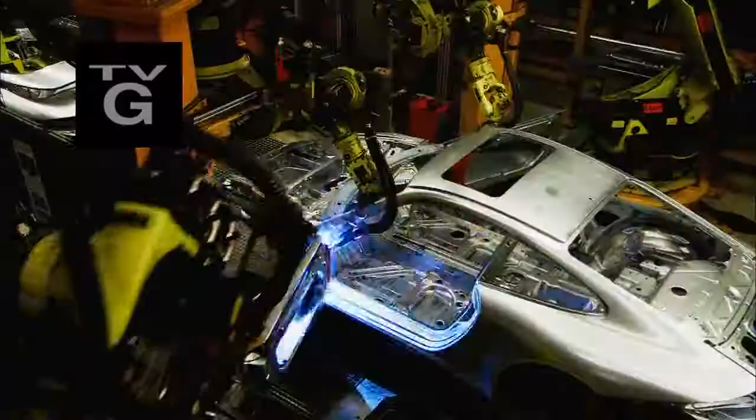German factory builds one of the world's most famous cars. The 911 is the icon of the sports car industry. It's the shape, it's the engine in the back, it's the feel it gives you, it's the emotion. The factory runs like a precision machine, building hundreds of engines a day. The product and our manufacturing process are one unit, and that's our secret of success.

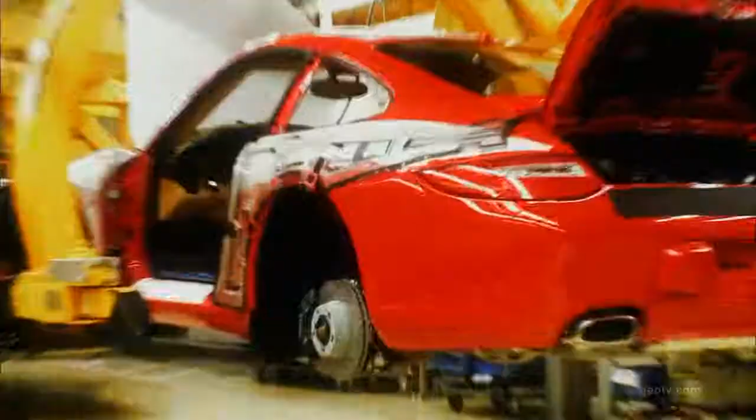Automation, technology, and skilled human labor combined to build 16 versions of the Porsche 911, including the 911 GT3. Lots of our customers, they want a race car, and they want a race car that they can use on the normal street as well. The Porsche 911 has been made for more than 4 decades on the same grounds in Stuttgart, Germany, at Porsche's ultimate factory.

The Porsche 911, small, light, nimble, and always powered by a flat 6-cylinder engine in the back of the car. Automotive journalists say the 911 may offer the ideal connection between car and driver. The 911 is like a glove that fits you perfectly. The car communicates very directly what it's doing, so it's a very emotional driving experience to have a 911 under you.

That emotional experience is tempered with practicality. You can go to your groceries with the car, you can go shopping. You can use it during the week going to work. And if going to work involves commuting on parts of the Autobahn without a speed limit, all the better.

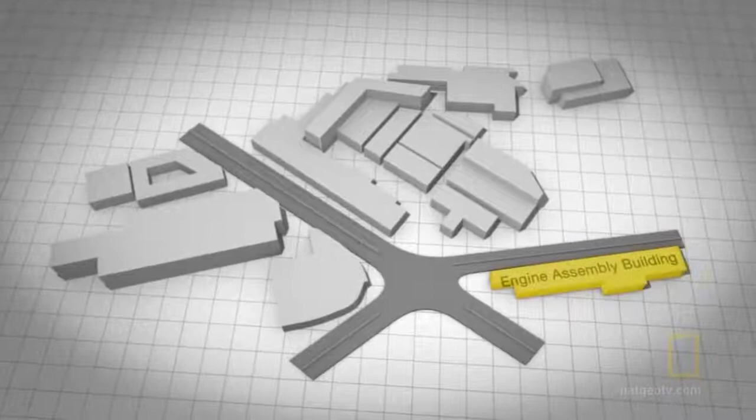Since 1964, every 911 ever built has been made in Porsche's ultimate factory in Stuttgart, Germany. The factory consists of several industrial buildings that are linked together. The car's body shell gets its color in the paint shop. The 911's famous flat 6-cylinder engine is built in the engine assembly building. Leatherwork for the car's interior is handcrafted in the upholstery shop. Finally, all the pieces come together in the vehicle assembly building, with its 117 assembly stations.

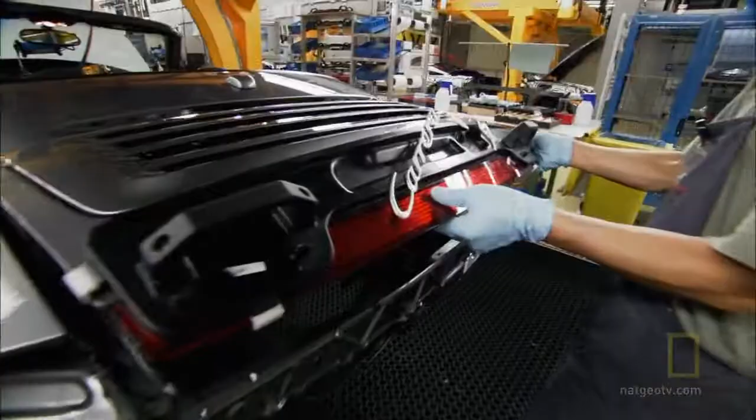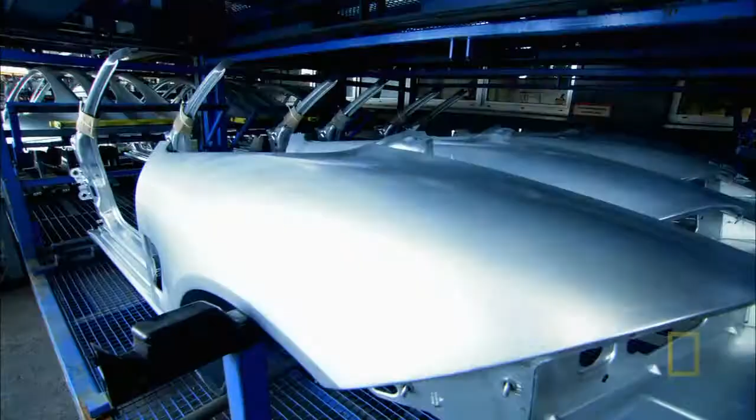The factory builds all 16 models of the 911, plus 2 Porsche Boxster models on the same assembly line. Every day we build approximately 40 Boxsters and about 110 Porsche 911s. The 911's body begins in the body shell assembly building. Outside the body shop, stamped steel body panels are standing by. Inside, 105 robots, along with teams of skilled welders, fuse the car's frame together.

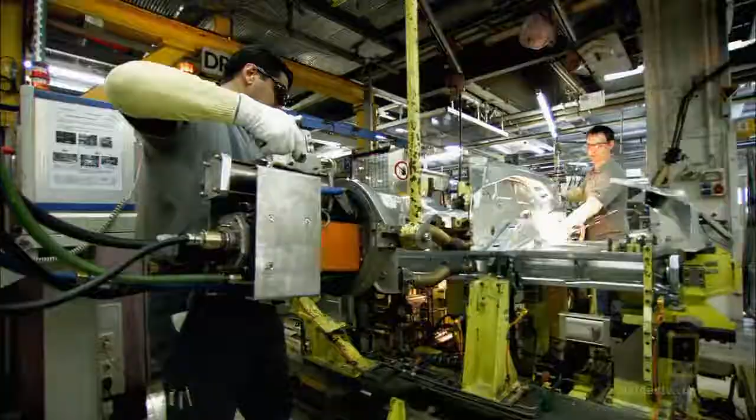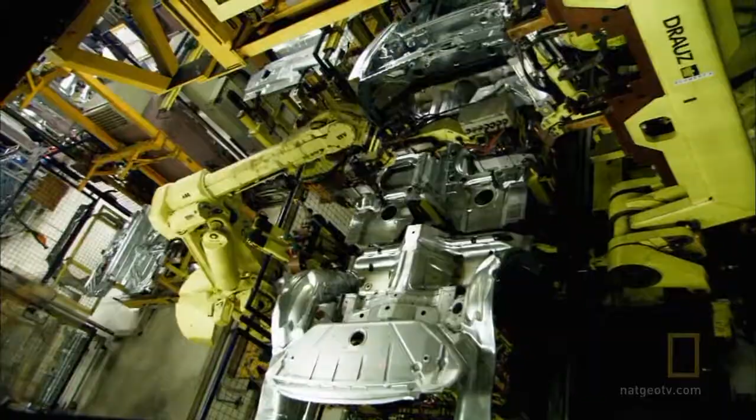The frame is made of 3 sub-assemblies: the front compartment, the mid-floor pan, and the rear compartment. Each sub-assembly is welded together from stamped steel parts. This welder spot welds the front compartment of the frame, while this welder works on the rear compartment. The front compartment is then sent off to be joined with the rear compartment. When the mid-floor pan is added, clamps hold the 3 pieces in place. Then the robot welds them together, making them one.

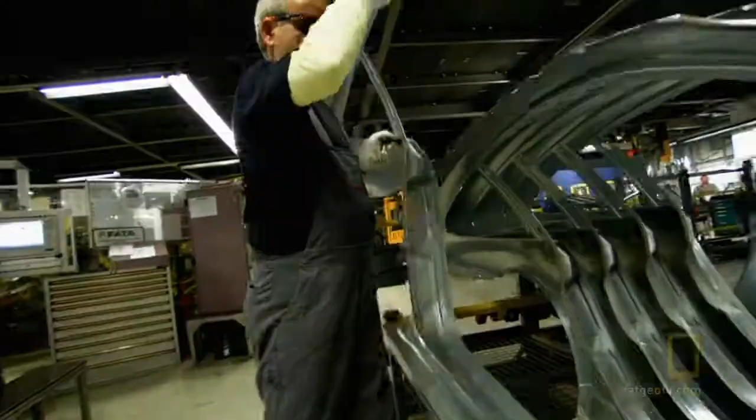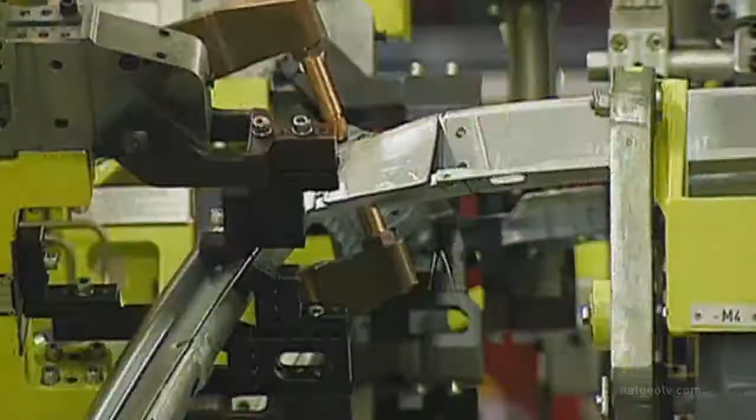A team of human welders places a shield between them to protect against sparks and glare. They reinforce the job, welding seams robots cannot reach. At this point, every 911 frame on the line is identical. But all that changes at the geometry station, where the various model rear side panels are welded onto the vehicle. Here, the car becomes a hardtop or a convertible cabriolet. Since this car is destined to be a hardtop, robots ensure it gets a roof.

When the welding is done, another group of robots attacks the frame. This time not to weld, but to pierce it. Hundreds of rivets and screw holes will allow technicians to attach components to the body later in the assembly process. Next, robots select doors and weld door hinges to the frame. Almost 5,000 welds later, the robotic work is done in the body shop.

Now, workers place the metal body panels that give the 911 its unmistakable front shape. It starts with the front quarter panels. And at the next station, the luggage compartment cover or hood. Now the body shell is complete. Even in this raw form, the body has the iconic shape of the classic Porsche 911. A shape that has been world famous for more than 40 years.

When the 911 was launched for the first time in 1964, the design was almost shocking, or you could say very much ahead of the time. In that time, the Porsche 911 has seen evolution in its design, but never revolution. There may be no other car that has changed so little in appearance during the course of several decades. It may surprise some to learn that this high-end sports car's beginnings can be traced to another famous, but much more humble car.

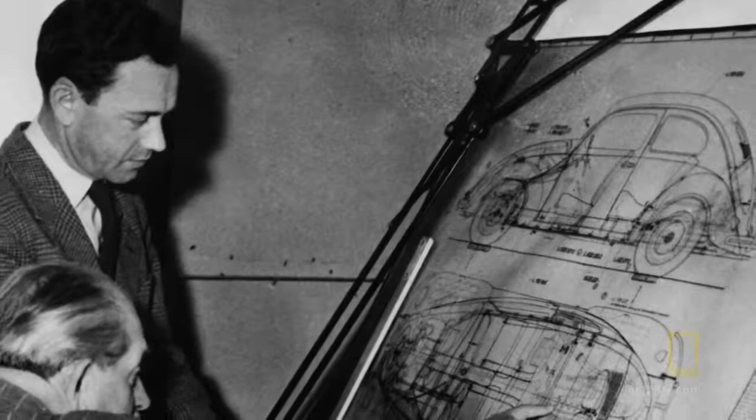After World War II, Ferdinand Porsche's son, Ferry Porsche, took control of the company. Ferry Porsche wanted a sports car, not for the general public, but for his own driving pleasure. A post-war shortage of parts forced Ferry Porsche to use components from the Volkswagen Beetle: the rear-mounted air-cooled four-cylinder engine, the gearbox, and the suspension. Ferry Porsche modified everything to make it more sporty.

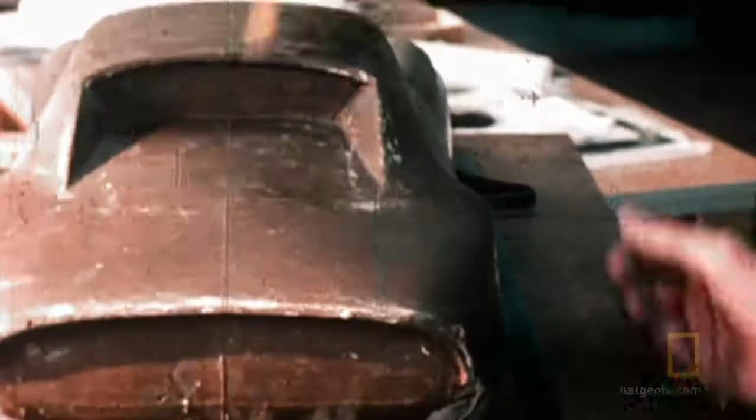The car that emerged in 1948 was the Porsche 356. More than 75,000 were made over the course of 15 years. It was the first sports car to bear the Porsche name. In the late 1950s, Ferry Porsche wanted a new sports car. This time, he insisted on a more powerful six-cylinder engine.

For the new car's physical design, Ferry Porsche turned to his oldest son, known as Butzi Porsche. He realized a perfect successor of the Porsche 356 because he used the classic design line of the car, but he moved it in a very forward way. The result was presented in 1963 and eventually was called the 911.

Over the course of 4 decades, the design was updated just 5 times, resulting in 6 generations of 911s. I think the design carries on because Porsche always understood very well what you have to do to bring the 911 design language into the future.

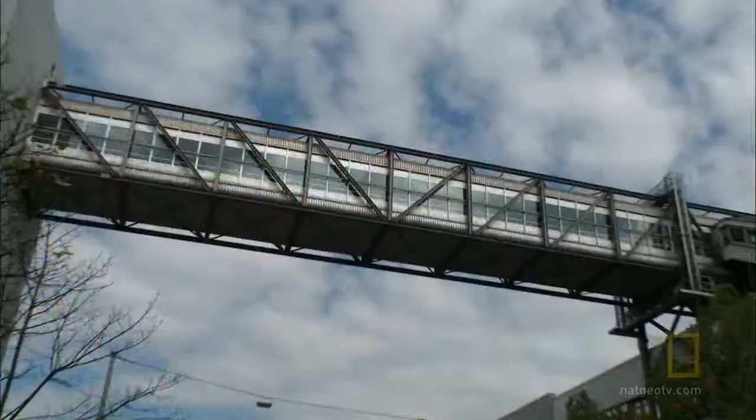Now, the unpainted body shells descended from the first 911s built in 1964 are ready to leave the body shop to be painted. The trouble is, the body shop and the paint shop have a 4-lane road separating them. So how does the body shell move from the body shop to the paint shop? A bridge. This bridge is going over one of the most used streets in Stuttgart. It takes about a half hour for a body shell to travel 94 yards over the bridge to the paint shop.

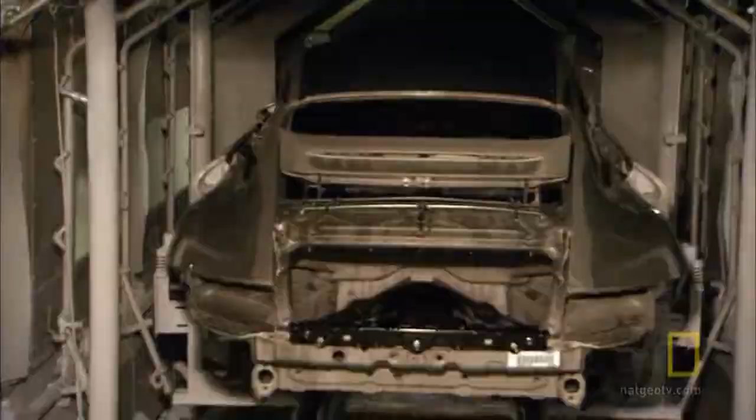The paint shop's first step is a car wash that removes dirt and grease. Bodies are then blow-dried to remove any lingering dust. Once the surface is clinically clean, it heads into a paint bath containing almost 16,000 gallons of paint. The bath holds an anti-corrosion paint called cathodic dip primer.

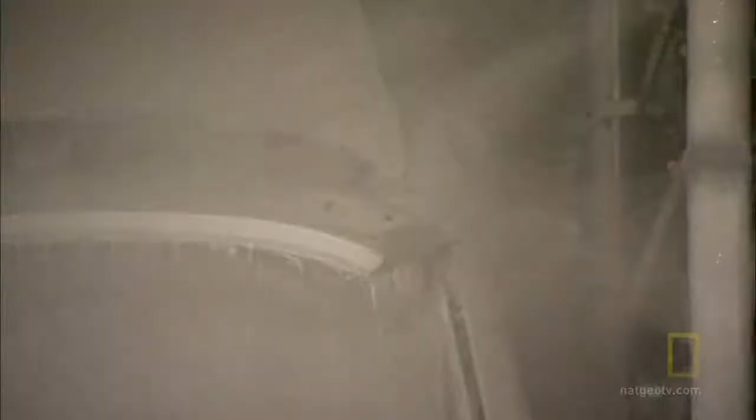The cathodic dip primer is electrically charged positive. The metal carrier that holds the car carries a negative charge. As the car is submerged, the carrier agitates the car, making sure the positively charged paint is drawn to every part of the negatively charged body. When the car emerges from the bath, the bond of the paint is so strong that excess paint can be washed off with water. Now the car heads into a dryer for 30 minutes to cure the cathodic dipped paint.

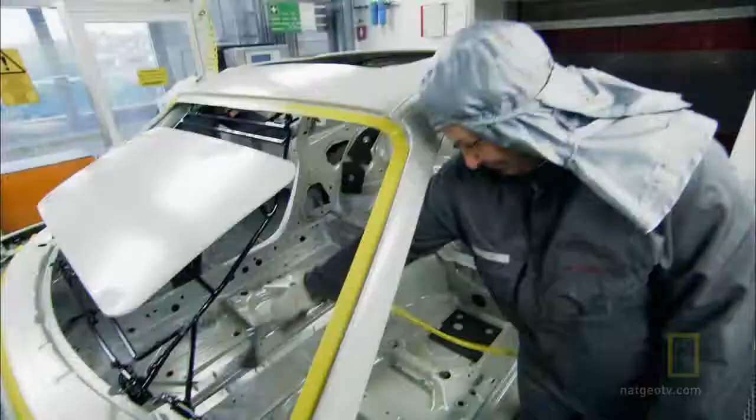A single speck of dust can ruin a paint job, which is why technicians dust the body before the primer coat. The interior of the car is primed by human painters. The exterior is where the robots take over. The primer is electrically charged positive. As the robots atomize the paint into the air, the paint is attracted to the car's negatively charged surface.

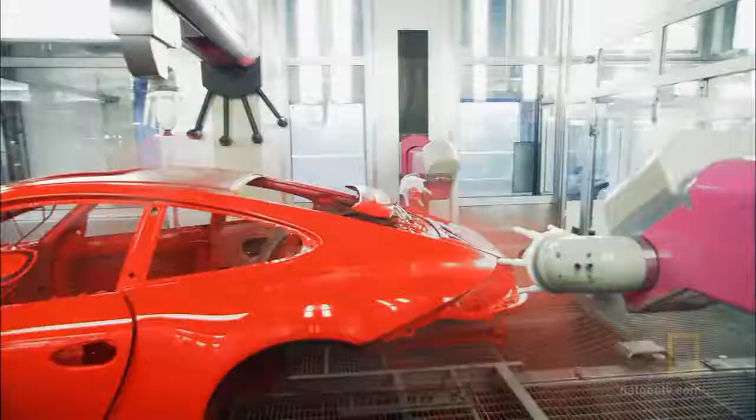It may look like the color coat, but it's not. The primer can be one of 5 colors: white, light gray, dark gray, yellow, or red. The selected primer color is the closest match to the color coat. With the primer complete, the car heads into a 338-degree Fahrenheit dryer for 30 minutes. Now, it's time for the car to get its color coat.

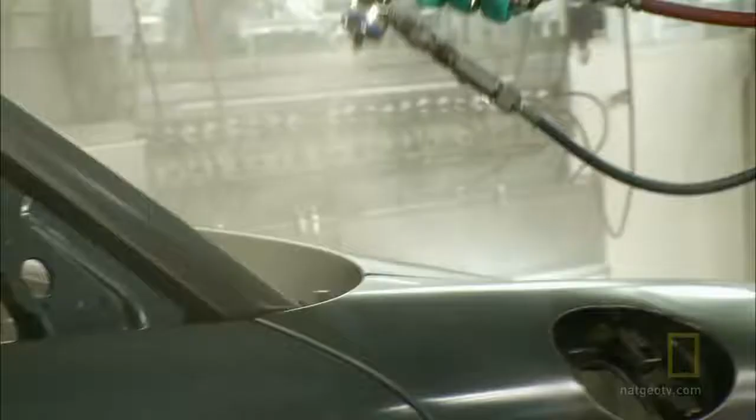The most popular colors for a Porsche are black, white, red. Porsche offers 12 standard colors, plus 9 premium colors. But for a fee, Porsche will custom paint your car any color you want. Because of the number of colors offered by the factory, the color coat is painted by hand.

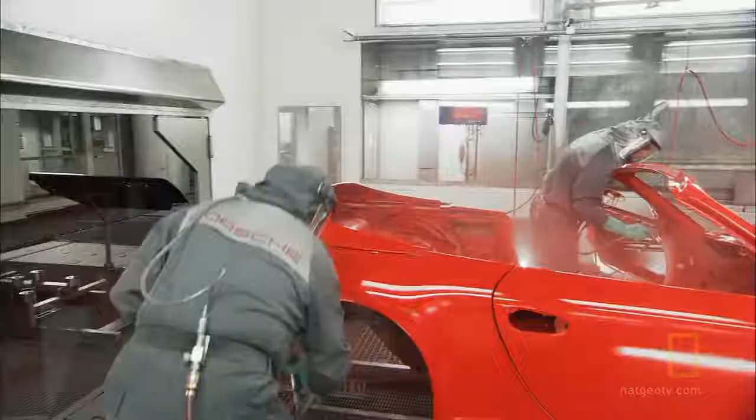Painters are trained to paint the body from front to back, beginning with the top before moving to the sides. It takes 3 years of training before a painter is allowed to spray the color coat onto the cars. Ventilation systems supply clean air through the painters' masks as they spray the water-based paint. In all, over a gallon of paint is applied depending on the color. With the color coat complete, the 911 heads into a 320-degree Fahrenheit dryer to cure the paint.

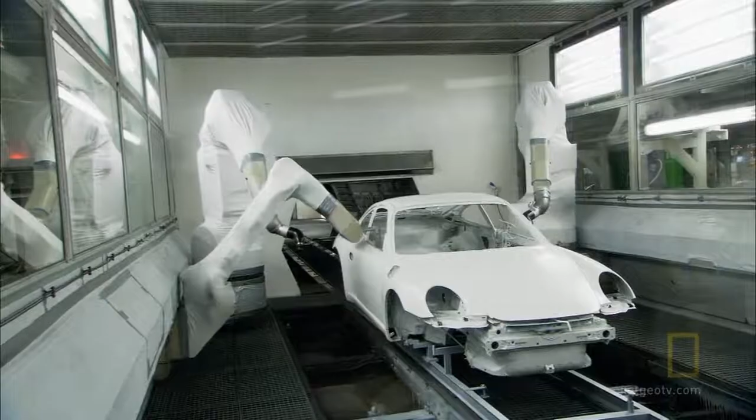The final layer is a solvent-based clear coat. The clear coat is painted by robots because the same clear coat is used for every car. The robot is also programmed to open the doors of the car and coat the interior surfaces. The paint shop's final job is putting the Porsche logo on the vehicle's hood. In all, it takes 8 hours for a 911 to enter the paint shop as a steel shell and exit a painted car.

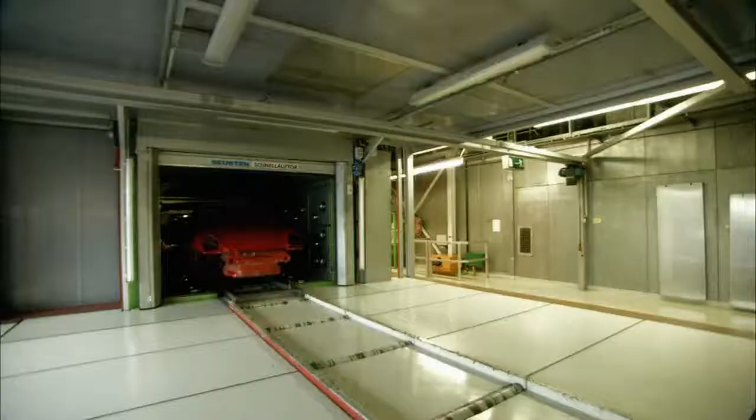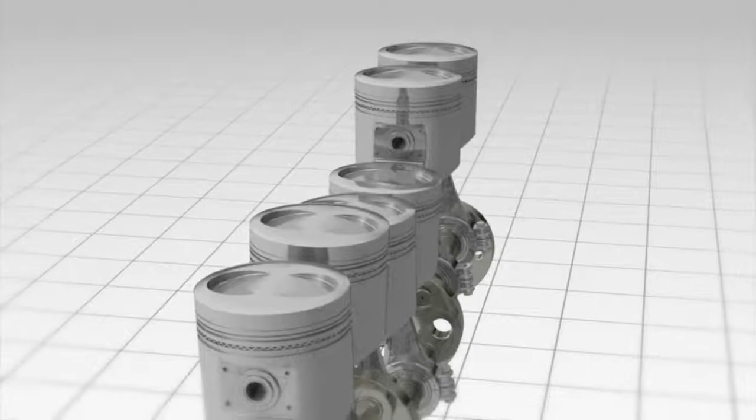Now, preparations are underway to build the vehicle's 6-cylinder heart. From the very beginning, since 1964, the heart of the Porsche 911 has always been a 6-cylinder engine. But not just any 6-cylinder engine. 6-cylinder engines come in 3 major types. Some are straight 6s. The most common 6-cylinder engines are V6s. The Porsche 911 has always used an engine known as a flat 6-cylinder, with 2 rows of 3 cylinders horizontally opposed to each other.

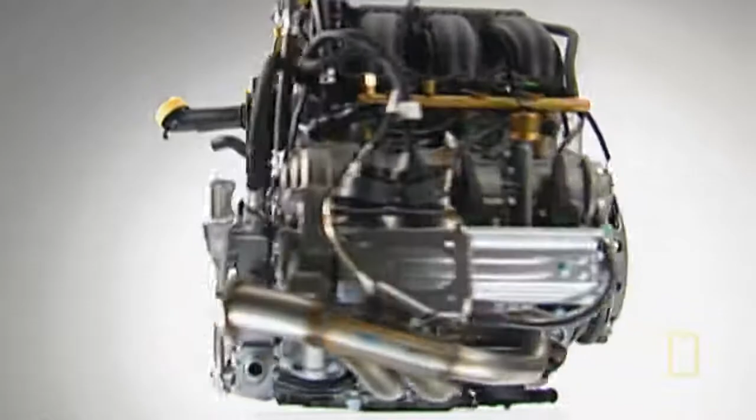Porsche believes there is a key advantage to the flat 6 design when used in its sports cars. The biggest advantage of using a flat 6 cylinder in the Porsche 911 is its low center of gravity, because it's very small. You can mount it down low in the body. The lower center of gravity contributes to improved handling. The lower the center of gravity is, the more stable the car is at high speeds and in cornering.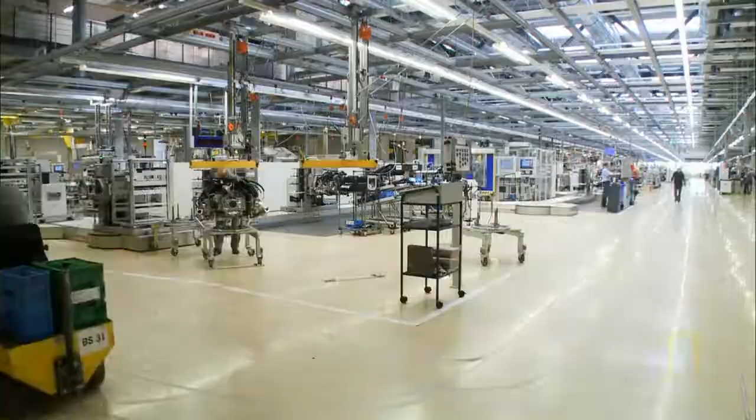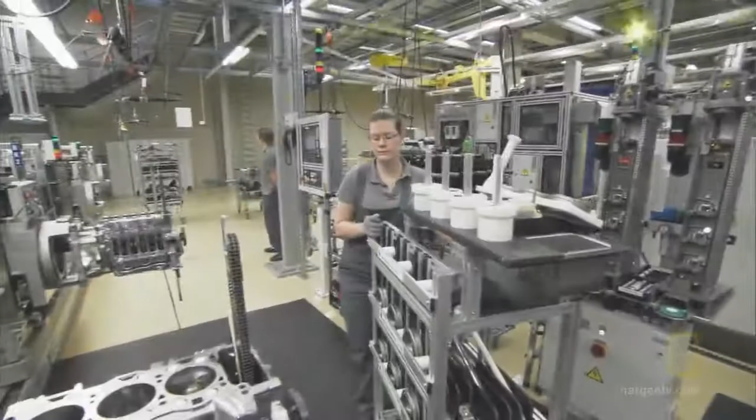Those famous flat 6-cylinder engines are made in the factory's engine assembly area. In Stuttgart, we build in total approximately 500 engines per day. Every 3 minutes, the plant completes a flat 6 engine. The plant makes more than 20 different versions of its flat 6-cylinder engine, ranging from 255 to 535 horsepower. Each version of the flat 6-cylinder engine has many of its own specific parts. The challenge is getting the right parts to the right place, just in time for the engine's assembly.

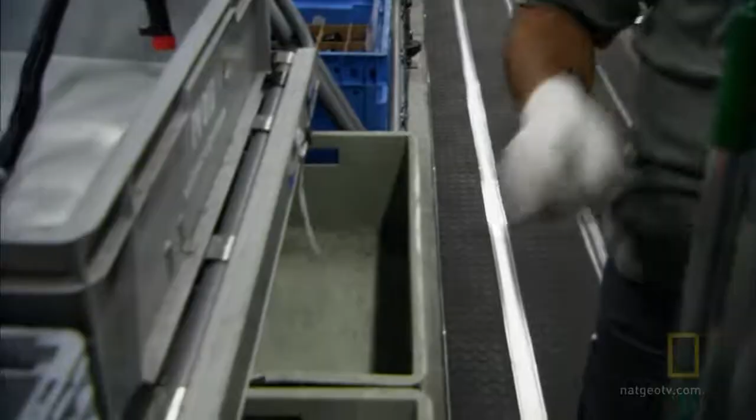So Porsche developed an automated logistics system. In the logistics building, a computer illuminates lights near the parts bins, indicating to a worker which parts to pick. Once the part is picked, the worker pulls a string, shutting off the light. Engine parts are loaded onto a cart. The cart is then picked up by Porsche's patented driverless transport system. Carts are programmed to take a specific route to the engine assembly area. The route takes them over a bridge and into an elevator, where they go down 1 floor and deliver the parts to the engine assembly area just in time.

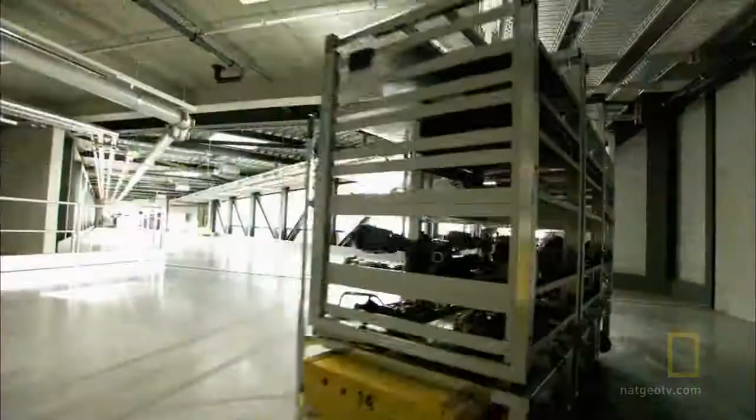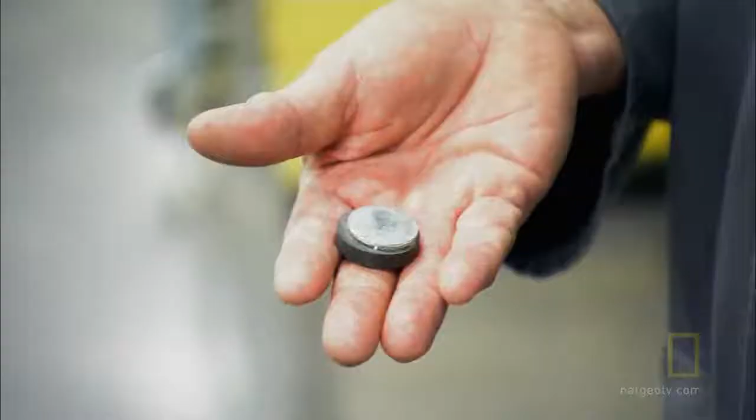The factory has a total of 21 carts. 9 of the carts are dedicated to removing completed engines from the engine assembly area. The carts take the finished engines back up to the logistics area. But how do the carts know where to go and which path to take? Every 5 meters, we have magnets embedded in the floor, which are covered by concrete. And between one 5-meter distance and the next 5 meters, the cart is programmed to find its way. This, for example, is such a spot. Each cart travels over 12 miles every day at speeds of over 3 miles per hour.

The people on the floor seem to know how to stay out of the cart's way, but just in case, there are safeguards. As we can see, nothing happens even though it's carrying a heavy load, and these carts move at quite a high speed. But nothing can happen because we have a built-in safety system in there.

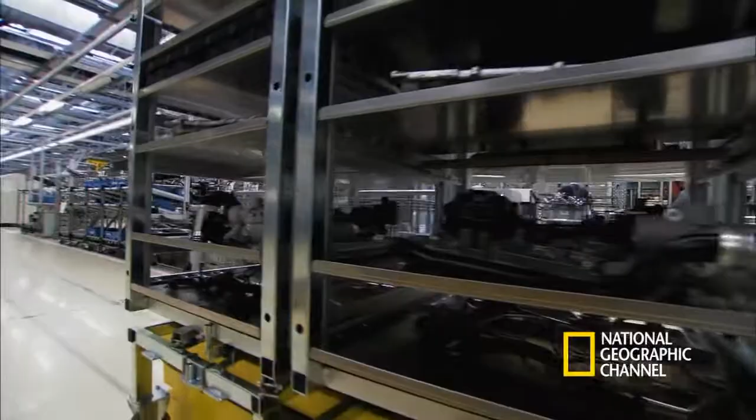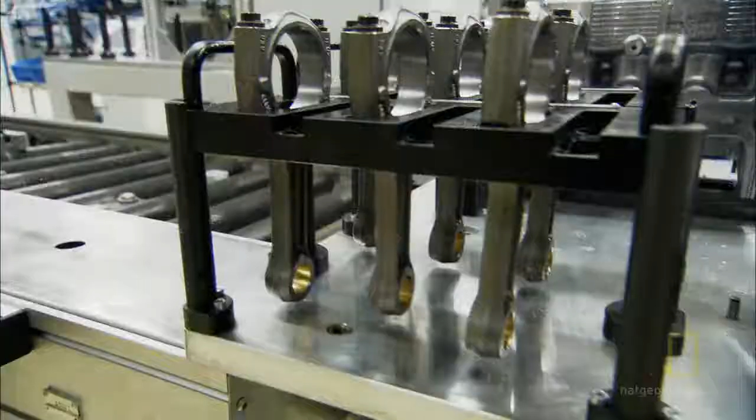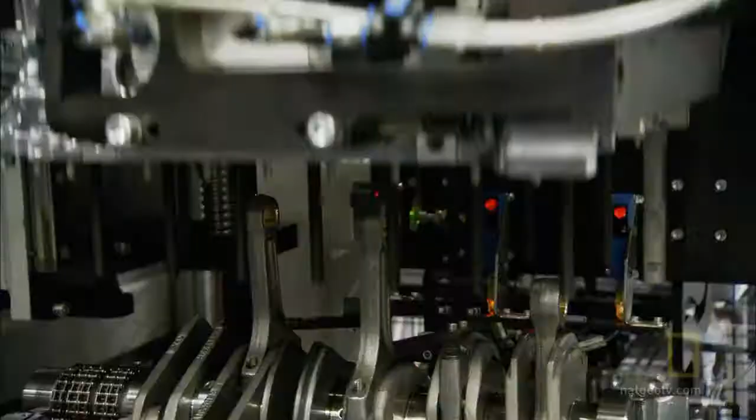For every flat 6-cylinder engine made, there are 3 parts deliveries to the assembly floor. The first parts delivery is pushed by hand. It contains both halves of the crankcase, the crankshaft, and pistons. Early in the line, pistons are assembled. Then the first 3 pistons are carefully put into the crankcase. Then, the crankshaft is placed into one of the crankcase halves. That first row of pistons is linked to the crankshaft. Then, a robot installs the second half of the crankcase and bolts it on.

Now, the partially assembled engine travels to the main engine assembly line. Meeting that partially assembled engine, a special carrier called a crossmember. The crossmember allows technicians to maneuver the engine for easier assembly.

You can rotate the engine, you can lift and lower the engine, so that the workman always works in an optimal ergonomic position. 2 stations down, a technician puts the crossmember to work, flipping the engine on its side and installing the remaining 3 piston heads. The technician cranks the engine to check the piston linkages with the crankshaft, ensuring the operation is smooth.

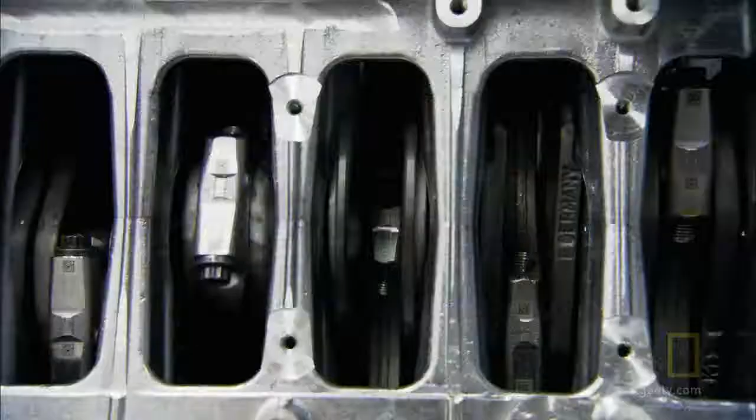Next, a cylinder head is placed onto one side of the engine. The cylinder head contains valves that will let air into the cylinders and take exhaust out. Technicians put the crossmember to work again, flipping the engine, so the other cylinder head can be installed.

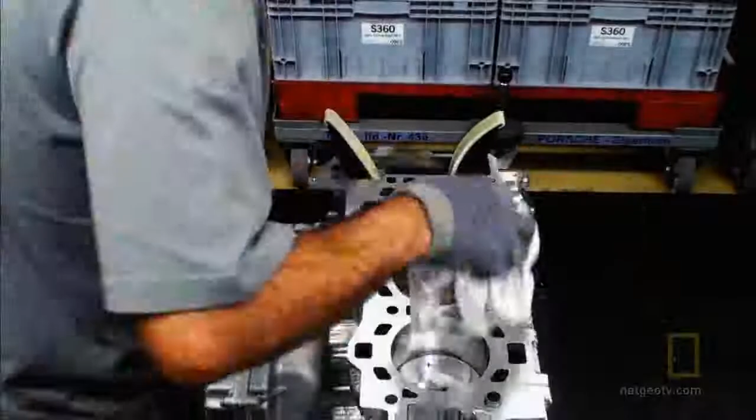Every 2 minutes and 44 seconds, the engine reaches a new station. Some stations are manned by human beings. Others are handled by robots.

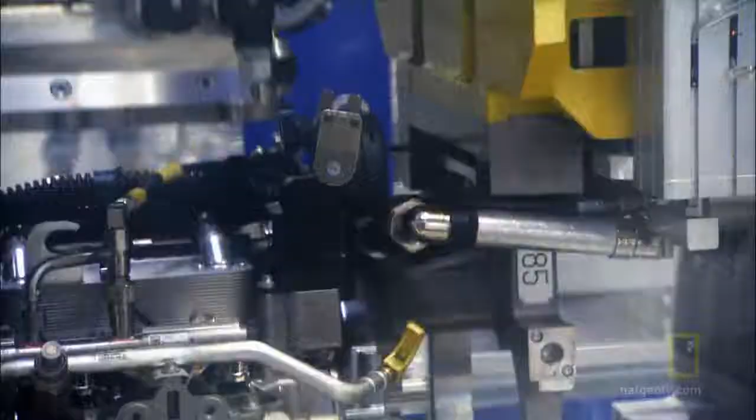About 2/3 of the way through the line, every engine goes through what's known as a cold test. Here, the engine is electrically cranked and turned. Its linkages and systems are checked by computer.

After the test, the intake manifold is installed. The engine will breathe in its air through these plastic tubes. The engine exhales through the exhaust manifold, the last major part installed. It's taken about 6 hours to build the flat 6 engine from start to finish.

At the end of the line, completed engines are taken away by the driverless transport carts and delivered to a holding area. They'll eventually be taken to the main assembly line and married to the vehicle's body.

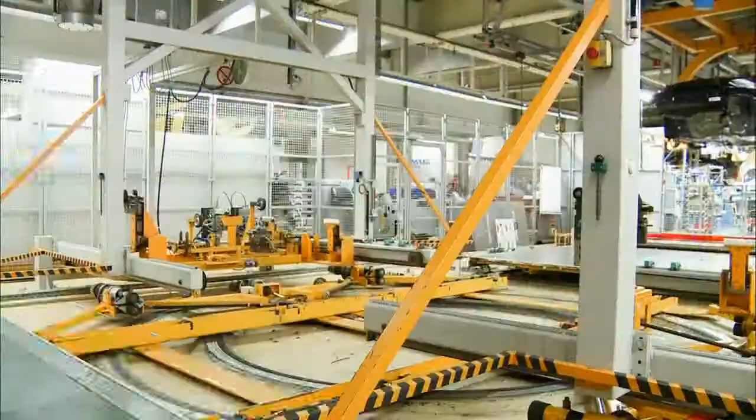At Porsche's ultimate factory in Stuttgart, Germany, the assembly line puts together 16 different models of the 911. Each 911 will spend about 15 hours moving down the line. The line has 117 assembly stations. Workers at each station have just over 5 minutes to complete their tasks before the next car moves into place.

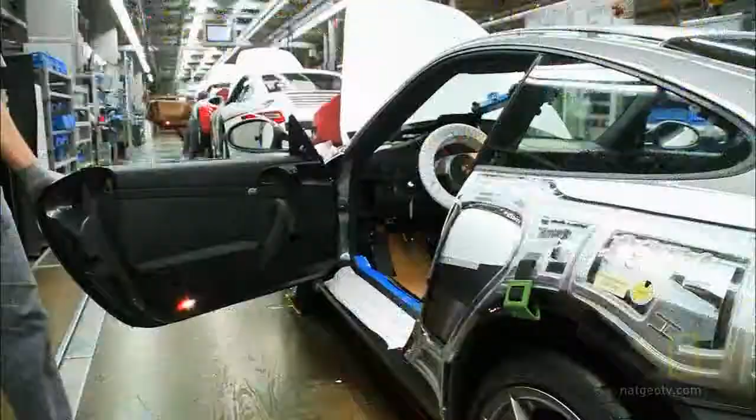But as they work, the line does not stop. The line is moving continuously so the technicians can keep working and don't have to stop during the feed.

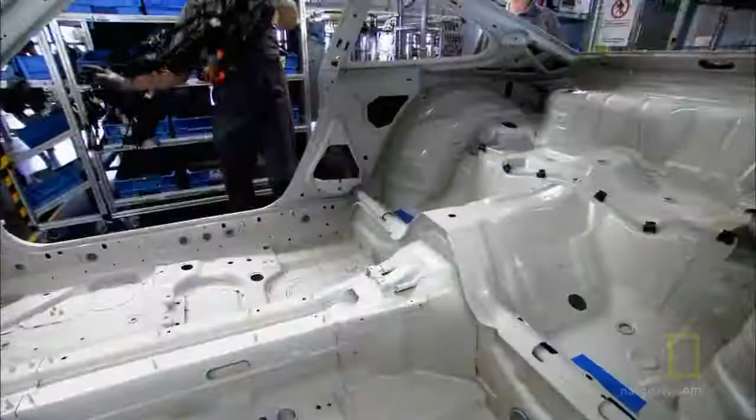Now, a painted body shell enters the main assembly line. Station 1. The 911's new paint job is protected with pads. Then the doors come off to allow easier access to the inside of the car throughout the assembly process. At Station 2, technicians snake wiring through the car, laying down the network for the electrical system.

Station 6. The first upholstered item is put in the car, the cockpit, which includes the leather dash. At Porsche, leather begins as tanned cow hides in the upholstery shop. The basic 911 has 40 upholstered pieces, including the dash, door panels, and seats. It takes 6 hides to upholster an average 911.

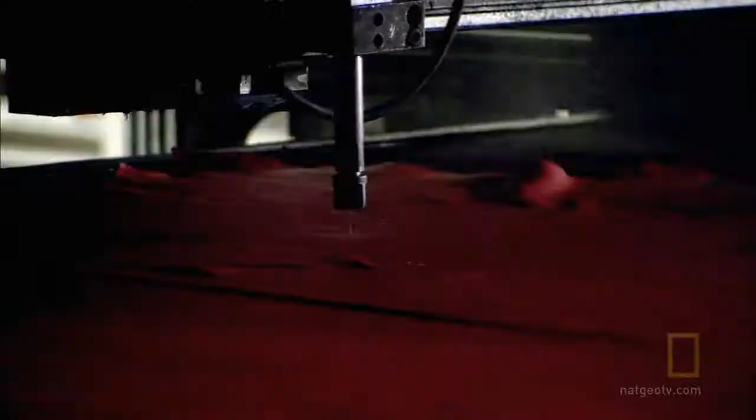Hides are laid out on a machine that automatically cuts the pieces to be upholstered, while avoiding flaws in the leather. The machine uses a powerful water jet to cut the leather. The pressure coming out of the nozzle is over 43,000 pounds per square inch, about 30 times the pressure of a power washer used to clean buildings. The machine is done, and now the pieces are collected.

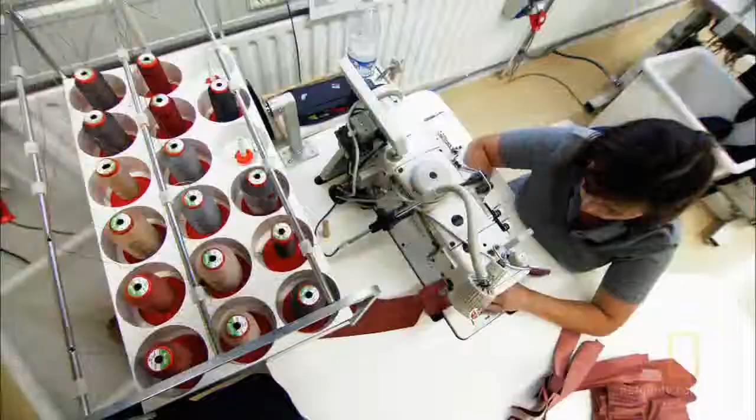The first workers to get their hands on the cut leather are the sewers, who stitch pieces together. Next, a robot sprays the stitched leather with glue. Then, a craftsperson has the painstaking task of fitting the leather to the dashboard frame. Heat makes the leather more pliable and workable. It also keeps the glue tacky.

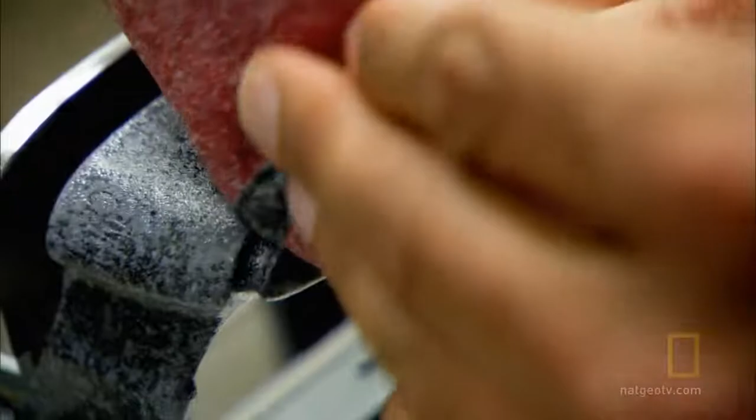The first challenge is fitting the seam in the frame's groove. Then, the leather has to be stretched over the top of the dash. Once the fit is right, he trims the excess leather with a knife and rounds the remaining material under the dash. A little pressure with a sand-filled weight smooths out any ripples and completes the job an hour after it began.

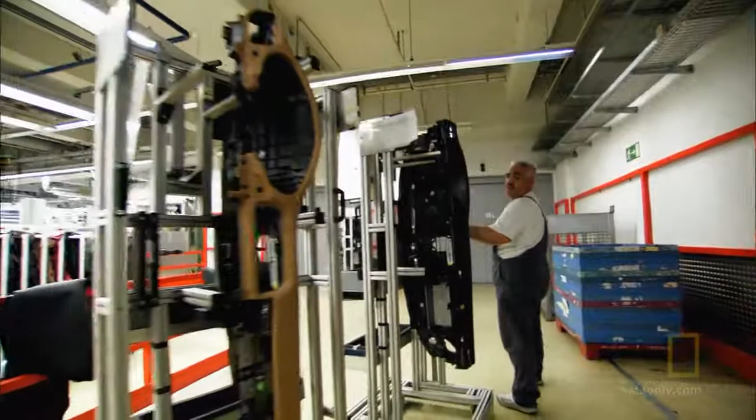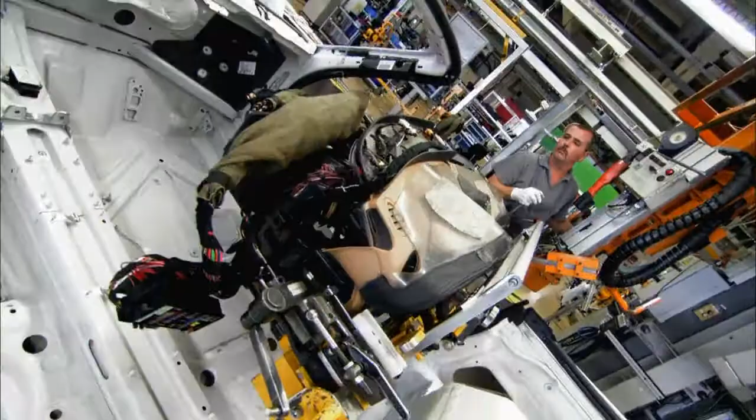The upholstered dashboards are sent to a pre-assembly area, just a few yards from the main assembly line. Here, they are built up into full cockpit assemblies, including gauges and steering columns. Once assembled, the cockpit is the first upholstered piece installed on the car. Six assembly stations are complete. The car's journey down the line is just beginning, with the most challenging assembly processes ahead.

Porsche's ultimate 911 factory in Stuttgart, Germany has 117 assembly stations. Some stations are where 911s get parts that differentiate them from other 911 variants. One popular variant is the Targa, a 911 with a retractable glass top.

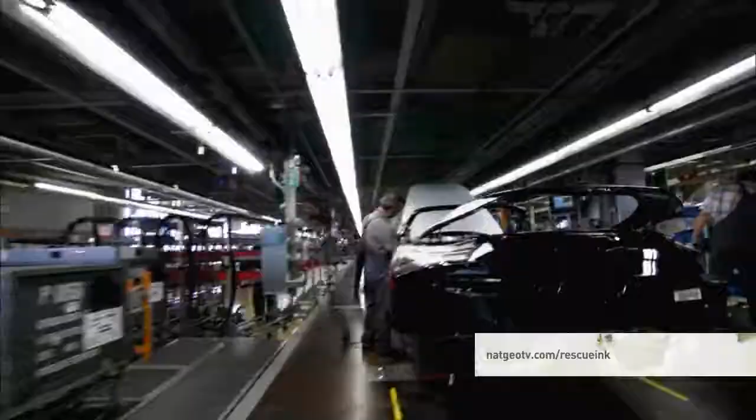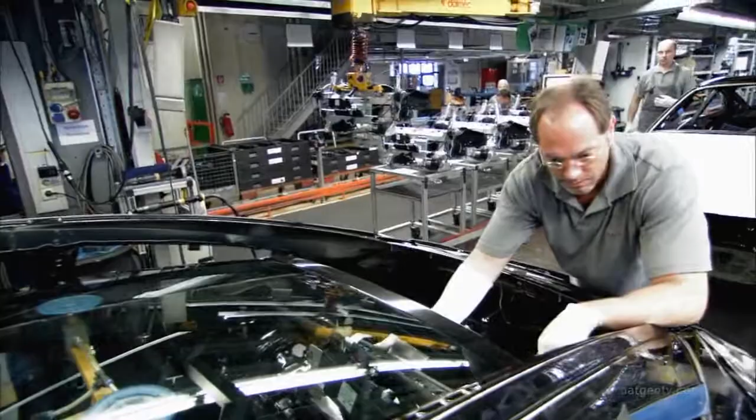If the 911 arriving at Station 14 is a Targa, this is where technicians install the huge glass top. Almost 115 pounds of glass hangs in the balance as technicians try to slide it in through the back end of the car, forming both the car's roof and rear window.

Down the line at Station 18, the assembly area's only robot installs the windshield. First, it applies glue to the inside of the glass. This robot works in the dark because of its infrared sensors, which help it position the windshield to tolerances of nearly 2/100ths of an inch.

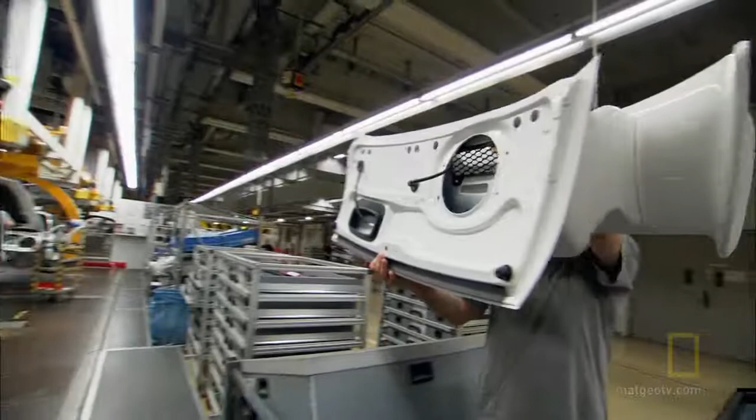Station 30. If the 911 coming down the line is a GT3, this is where technicians install the prominent rear wing. Airplanes use wings to create lift, enabling the aircraft to fly. The GT3's wing is angled to do the opposite, to keep the car on the ground. The faster a car goes, the more lift it creates, and we have to overcome that lift and push the car down on the street again, because that's what makes the car controllable.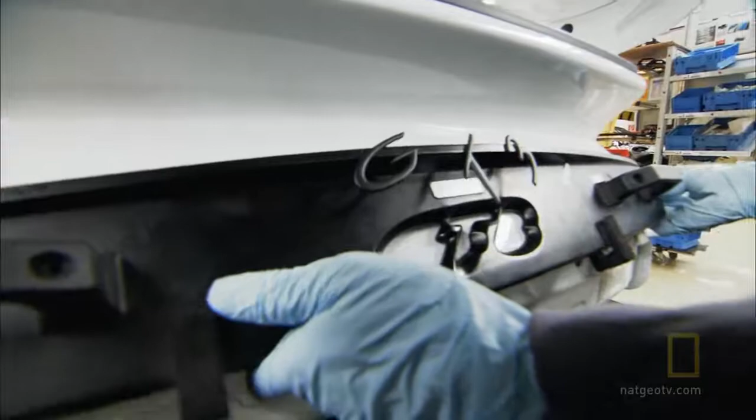Just a few stations down the line, Station 34. The name of the 911 model is spelled out for the world to see. Special guides hold the letters in place so they can be stuck onto the car.

Every car moving down the line is destined to be different. Each is built for a specific customer order with a unique set of options. That means different cars need different parts. Like the engine line, the main assembly line also uses a driverless transport system to bring parts to stations just when they're needed.

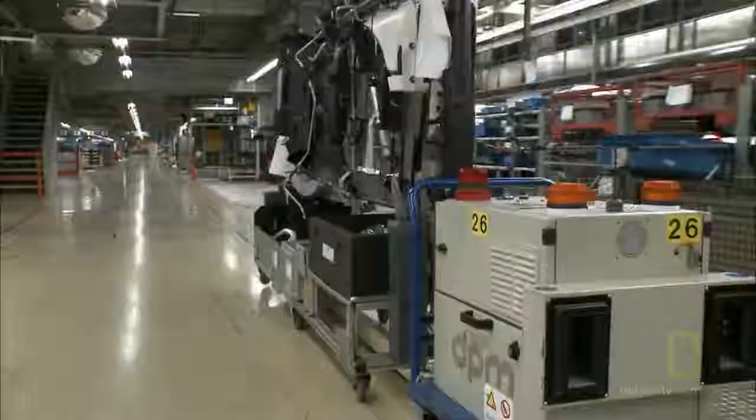But these carts use a visual tracking system to follow a black stripe on the floor. The problem is, the line is constantly moving, threatening to leave the cart and its parts behind. The solution? Simple. Link the carts to the moving line.

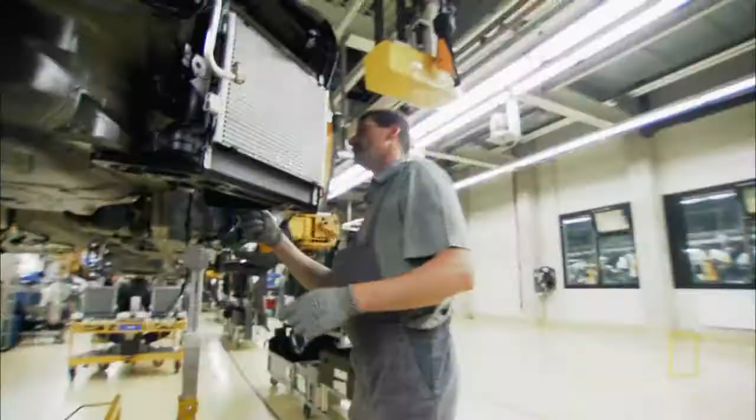Twenty-one stations down at Station 55. Two of those parts on a cart are the radiators. The 911's two radiators are installed in front of the car. Hoses cycle coolant to the rear where the engine will be located.

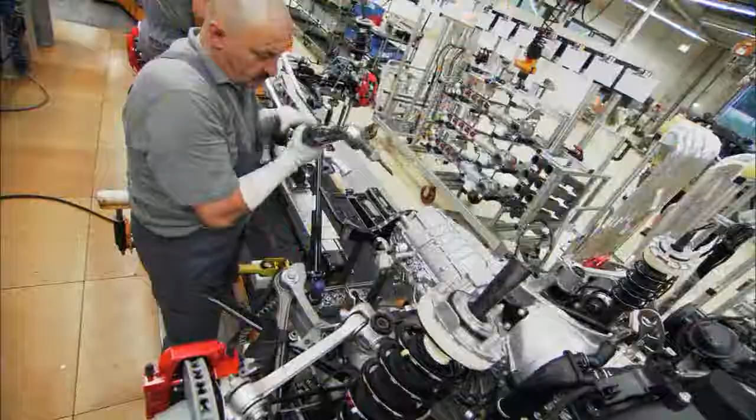The engine those radiators will cool arrives on the assembly floor near the halfway point on the line. Technicians connect the engine and transmission to a pre-assembly that also includes the suspension, brakes, and axles. It's all in advance of the most dramatic moment on the line, the marriage of the powertrain and body.

The Porsche 911 is famous for both its iconic shape and its rear-mounted flat six-cylinder engine. Now at Porsche's ultimate factory in Stuttgart, Germany, that body and engine are about to come together midway down the assembly line at Station 61. The joining of the body and powertrain assembly is called a marriage. It's a major moment on the line.

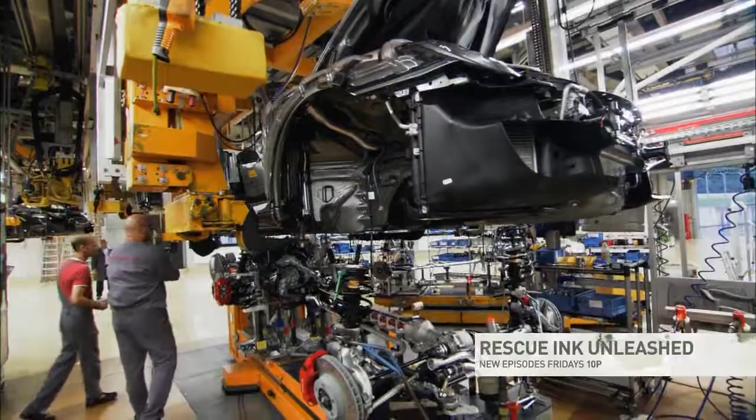The entire car that's been built up coming down the line is now bolted to the suspension and powertrain. Even so, it's like any other station on the line. Technicians must accomplish the task in about 5 minutes. Then they get to do it again and again.

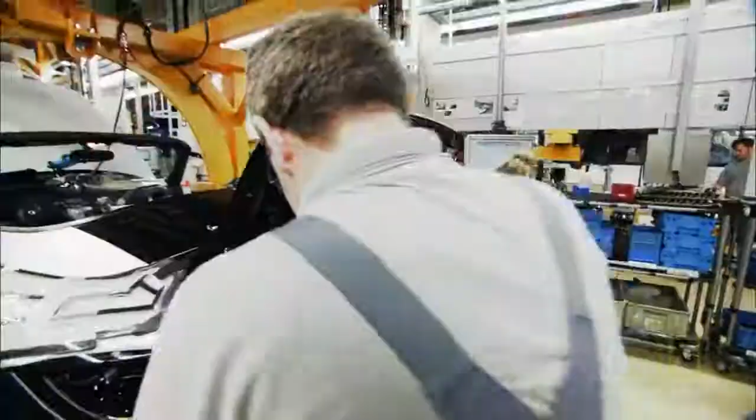The 911's engine is in place, although many would say in an unusual place. It's one of the few cars made today with an engine mounted in the rear. The main advantage of having an engine in the rear of the car is the traction, because the engine sits right on top of the driven wheels. It gives you a lot of traction, so you can put a lot of power to the street without having to fear wheel spin, which is not efficient.

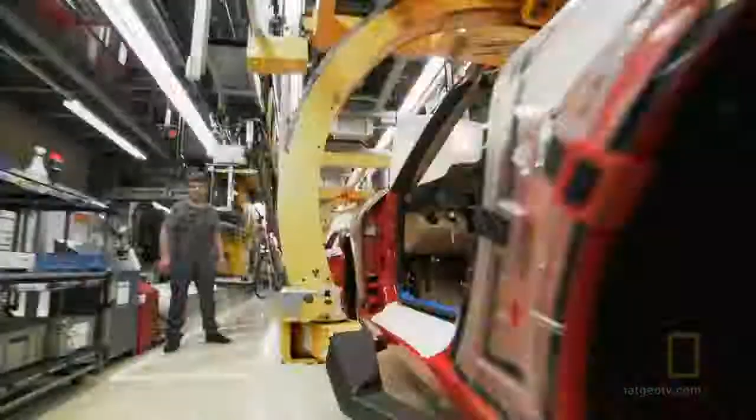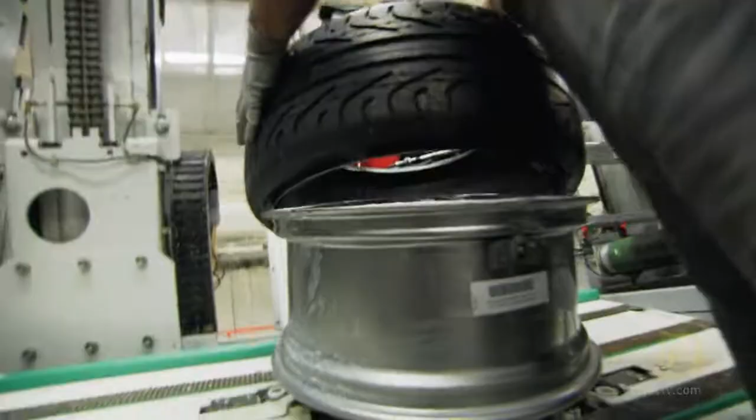Station 83. Signs the end of the line is nearing as fluids for air conditioning, brakes, and power steering are added. But if the end is near, the car will need its wheels and tires. They're at Station 98. Tires are fitted to the wheels just before installation. All 5 lug nuts are torqued at once.

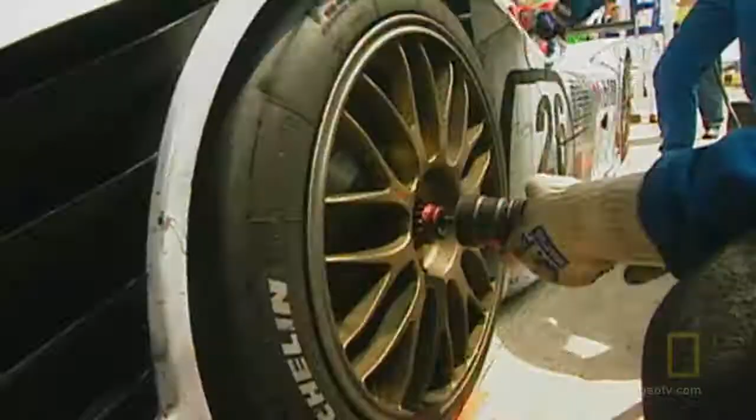If it's a 911 GT3, its wheels use a special center lock. The center lock system is used on race cars because it allows for faster tire changes. Porsche is the first company that offers a center lock wheel on a street-legal car. The factory uses a special tool just to torque the center locks on GT3 wheels.

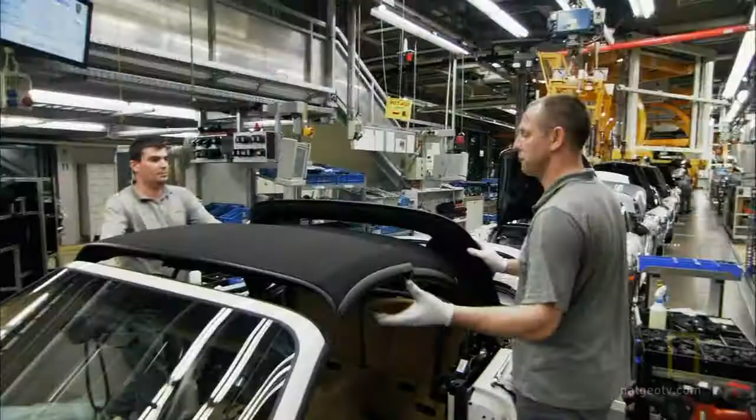With wheels in place, the cars seem ready to roll. But not quite. If the car heading into Station 103 is a cabriolet, it's still missing one crucial piece: the soft top. The 911 Cabriolet soft top opens and closes in just 20 seconds. The end of the line is approaching.

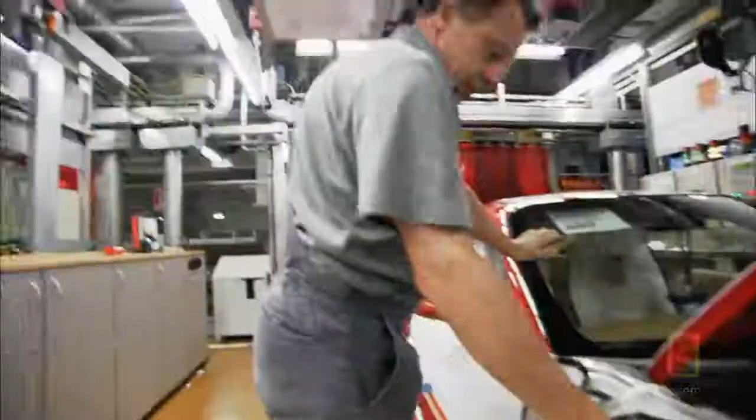Station 110. The doors that came off at the very beginning of the line now get put back on. And at Station 113, workers install the last major parts, the upholstered seats. Now, the car is fueled with more than 5 gallons of gasoline. Then, it's started for the first time. The first roll test simulates a bumpy road.

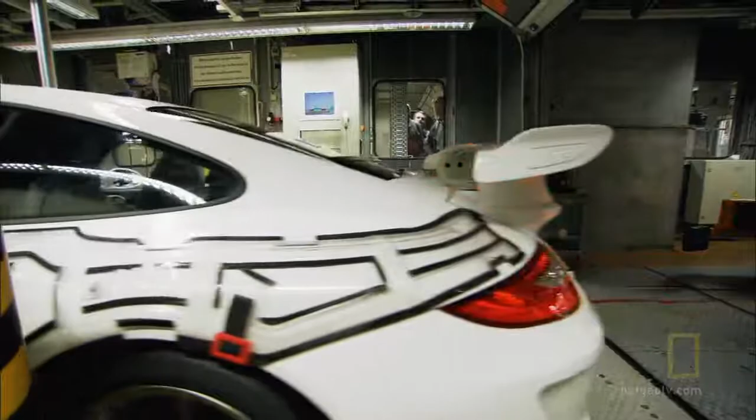Then, another roll test takes the car up to speeds of 75 miles per hour. The final inspection takes about 2 hours. Then, the cars leave the factory. A transport truck will now take them to a shipping depot where they'll eventually end up at dealerships around the world.

For more than 40 years, Porsche's Stuttgart factory has been turning out cars with this iconic shape. Just as the 911 has evolved, so have the factory's manufacturing processes. But if workers from the past could see almost a half-century into the future, they might be surprised to find today's workers building a car that looks remarkably similar.

Any generation of workers on the production line can take pride knowing they have built one of the world's most famous sports cars, more than 40 years running. Porsche's factory in Stuttgart, Germany is an ultimate factory.